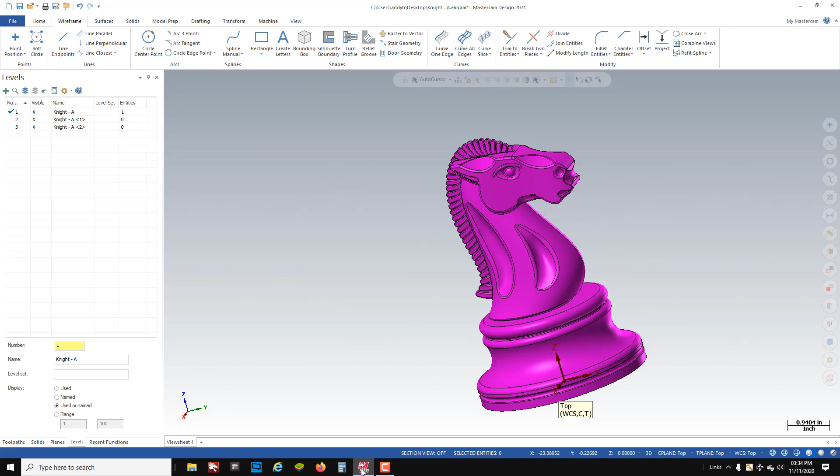The important note to know is that we're going to maintain a center of the part as our origin, meaning the X0 on the lathe will become the same Z0 when we transfer over to the mill, which will be center of the part, so that we can flip this thing 180 degrees in the mill.

Now, we're going to use a 4th axis mill for the milling here at CC, but anyone else doing this, any way to flip this part 180 degrees in the mill will work. So if you have a 4th axis, that'll work. If you just have a 5C collet block that you can flip, if not, you can just square up a block and put a 1-inch hole and use a set screw in the side of it, and that'll work as well. Just any way to hold this round part in a vise and then flip it 180 degrees for the turn.

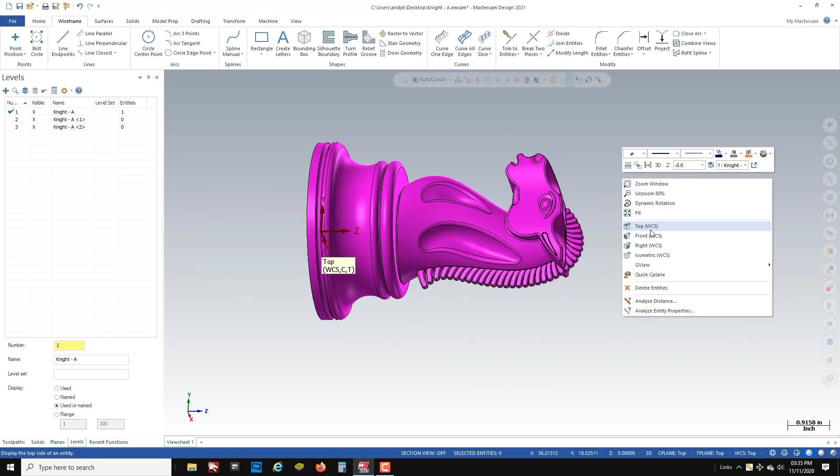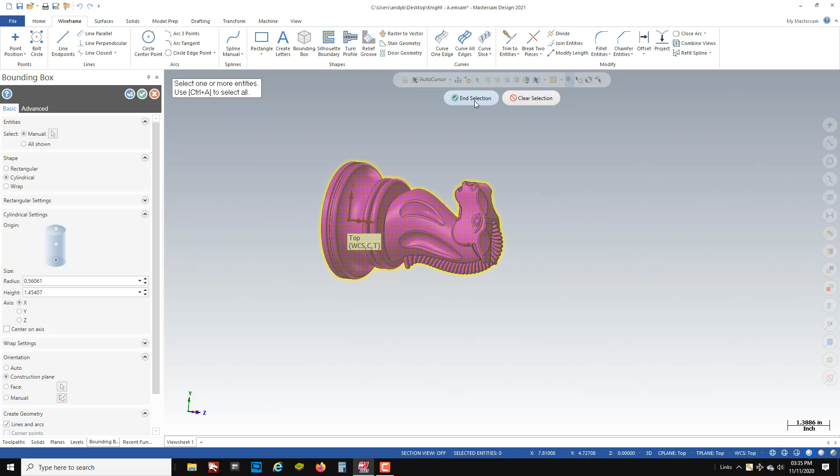So to get started with our video, the first thing I'm going to do is rotate this part into lathe position. So to do that, I want to find the center of the part, top of the head. So I'm going to go ahead and just create a bounding box, wireframe, bounding box. Now you can create this bounding box into a cylinder or into a square, it doesn't matter, as long as you can get the true center of the part.

Now I've had struggles with Mastercam and creating the cylinder. I'm not quite sure if it's a bug. I can show you here if I put it in the Z-axis and then I put it in a top view, you can see that my cylinder is off. It's not quite in line in X, and I'm not sure why, but if I change it back to a rectangle, then it makes it correctly. So I'm going to go ahead and just make mine as a rectangle. If it works for you as a cylinder, then great. It gets the same result at the end.

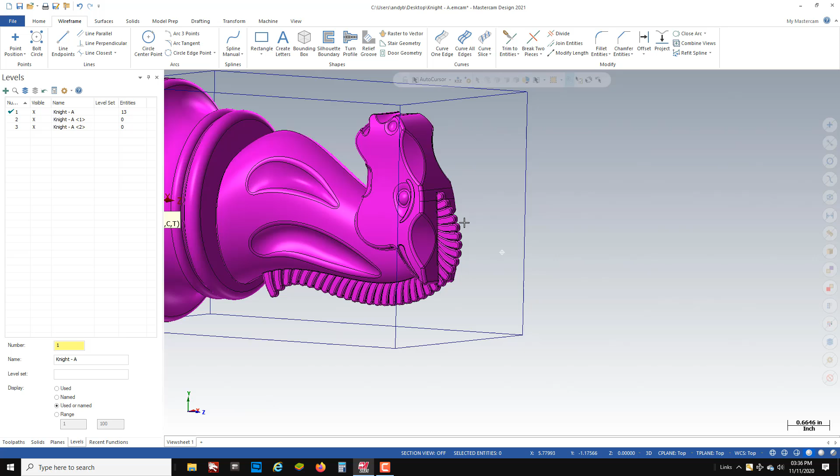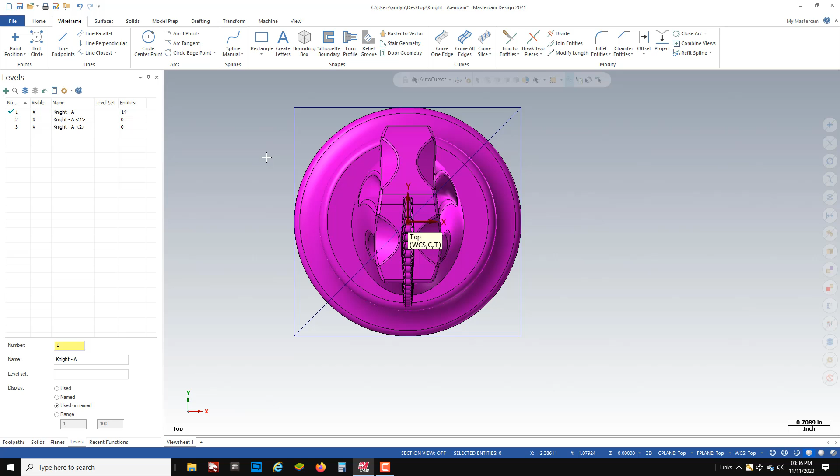So I create my box, and now if I just draw a line from corner to corner, the midpoint of that line will be the center point of my knight. And that's the point I'm really looking for. So with that point found, I need to now rotate this part to how I want to look at it when it's going to be in lathe position.

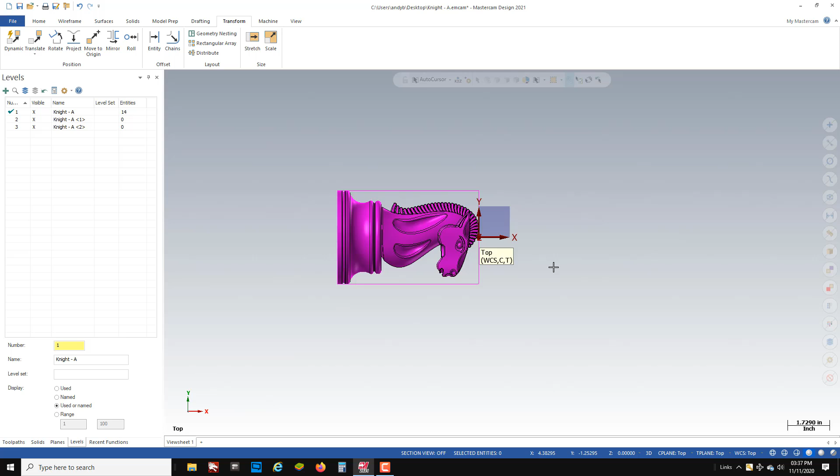So it doesn't matter where I click right now, I'm just rotating. I'm going to go 90 degrees this way. And then I actually like to get the head of the knight so that he's looking down instead of up. So I'm just going to go 180 degrees this way. Green check that. Now when I put it in the top view, you should see the knight in what I would call lathe position as I'm getting ready to turn it.

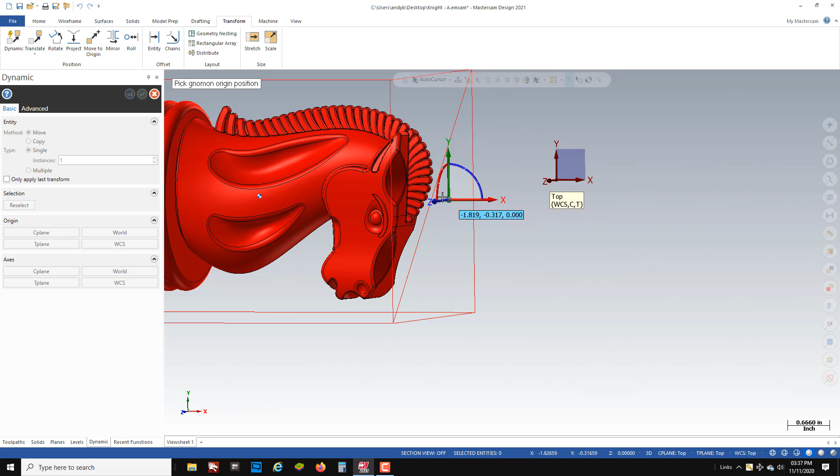So now I want to line up my origin here that I created from my bounding box onto my top origin, the original origin for Mastercam, or the gnomon, I guess you'd call it. Transform, dynamic, and selection. Select the midpoint of my line. Move it over to my standard gnomon, green check. Put that in a top view. Now I can set up my plane and get ready to start doing my turning toolpath.

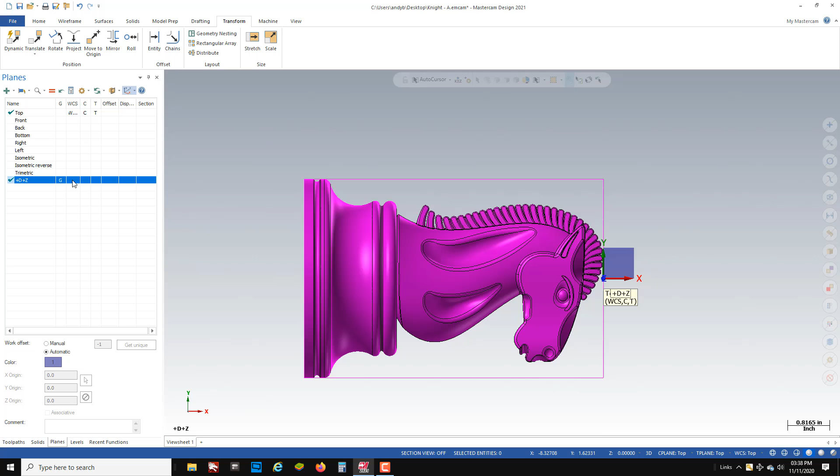Now I have not sized this knight at all for the finished size that it's going to be. I'm actually going to create my stock model first with the 1-inch diameter stock, and then I'll size my knight so that it fits in it. So before I create my lathe machine, I need to go to planes, create my +D +Z, activate my +D +Z for my grid, my work coordinate system, construction plane, tool plane. Now I can go to machine, lathe, default.

Now if I go to my toolpaths, you'll see there's a machine here. When I go to my stock setup, under properties, I'm going to tell it 1-inch diameter stock and 5 inches long. I'll green check that. Now under my chuck jaws, under the properties, I need to move over to the parameters tab. This is a new position in 2021 compared to 2020. So go to my parameters tab. I can tell it 1 inch diameter stock and a Z position of -4 inches.

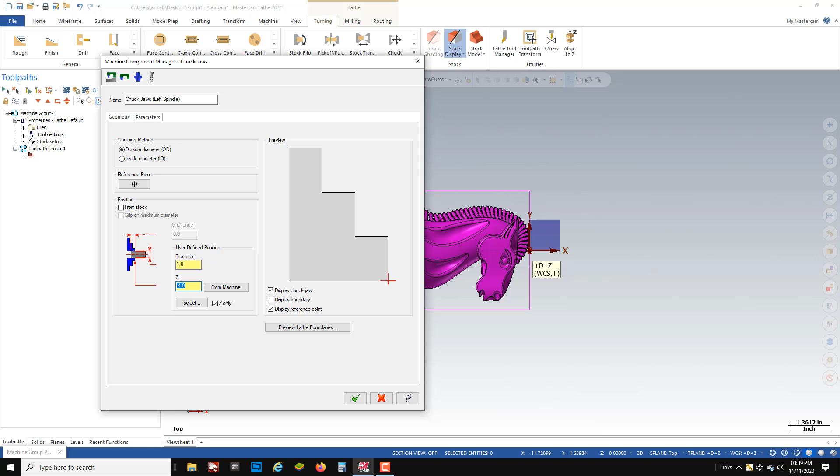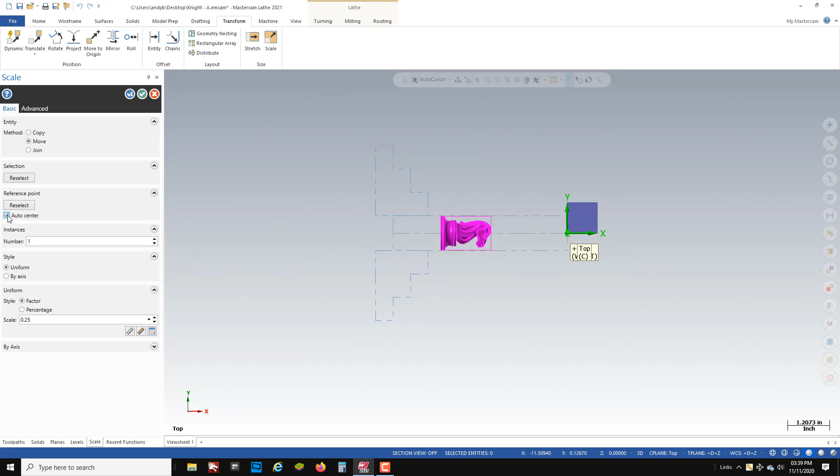And when I green check that, now you can see part of the chuck jaws here, and you can see that this knight is huge right now compared to what I want it to be. So now I just need to scale it down to position. So if I go transform, scale, grab the entire knight, my auto center will be on. I'm going to turn it off. And then I'm going to scale it to a factor of 0.25.

So if you see I'm at 0.25 here, then the actual knight fits within my stock boundaries. So we'll green check that. Now that should be a good position for the knight. Everything's perfectly on center. I'm scaled to the right size.

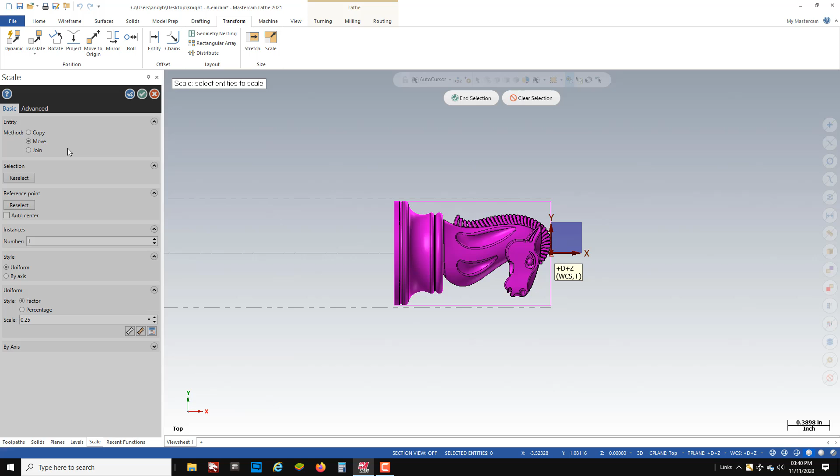You may want to make your knight a little longer. It depends on how big you made your other chess pieces. To do that, you're just going to go scale, grab the knight, and I'm going to scale by axis. So I'm only going to scale the x-axis. I'm going to leave the y and the z alone.

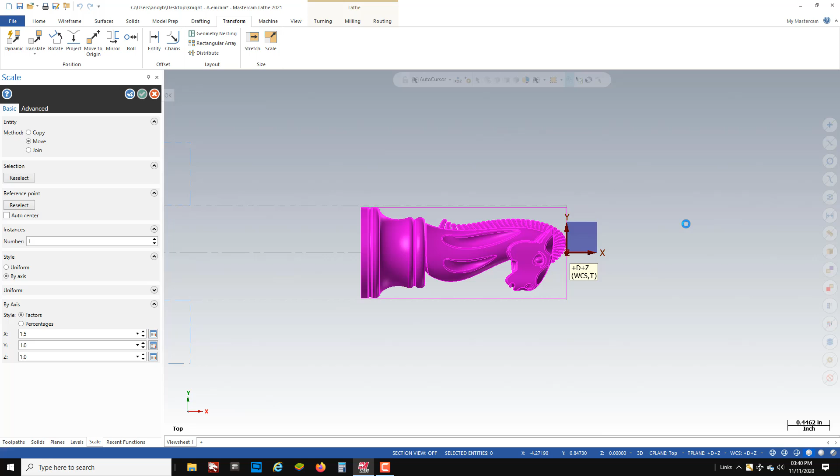So you can see that kind of stretches my knight out and makes him a little taller, which is perfectly fine to do. So I'm going to scale him out 1.5 inches taller, or 150% of his normal size. Green check. Now my knight's ready to go and be machined.

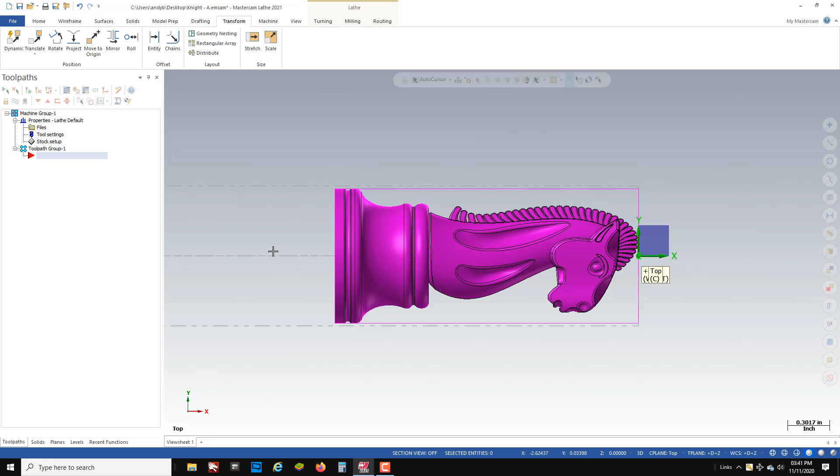Now when we're programming for a lathe, we don't typically program an actual model like this. We just need the wireframe for programming. So to create the wireframe from this knight of the outer extents, what I would use in a lathe, I'm going to first create a new level, level 4, and I'm going to make sure it's active. Now when I go to my wireframe, I can do a turn profile.

Select my knight, end selection, and it's actually going to create, when I green check it, the outer extent of what's being programmed for the knight so that it'll all fit into a round part. So you can see that it created the wireframe, and this sticks out a little because if this knight was to spin around in a symmetrical fashion, this nose would stick out on the top.

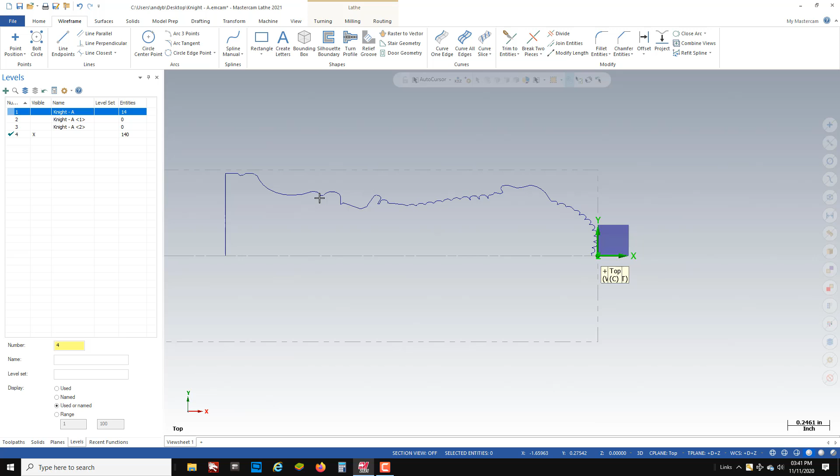Well, because I put it on its own level, I can now turn off the other levels, and now you can see this is what it would look like if I was to run this knight 100% lathe. Well, this needs a little bit of cleaning up. I don't like to have anything out here in front, below the highest point in Z when it comes to Z0.

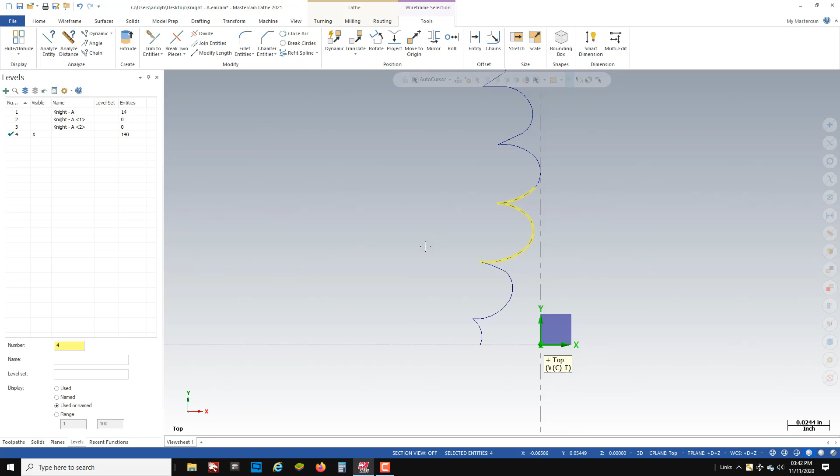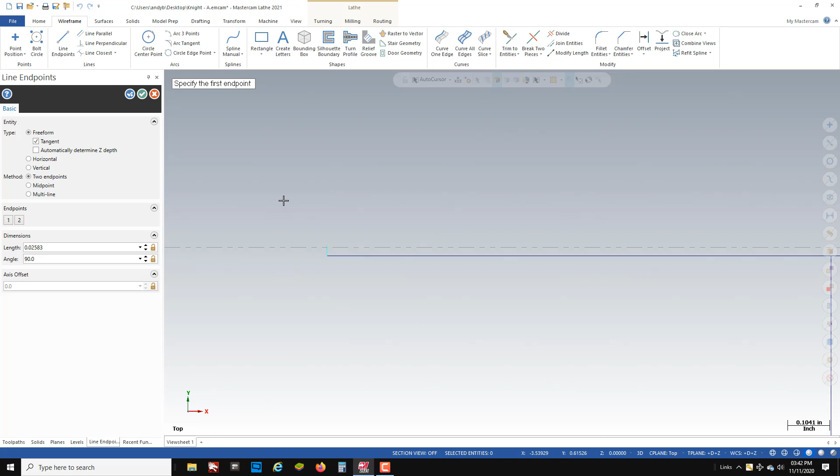And what that'll do is give myself extra holding stock when I transfer from the lathe to the mill. I have something that I can put in my fixture block or my 5C collet or my 4th axis to clamp onto. And then I always like to draw my line up past the stock so that it knows how much it's going to be roughing. And from there, we should be good to go to start programming this part.

Now, sometimes doing that turn profile, it'll leave some little gaps in here. If we find one, it'll show it to us when we're making the chain, and we'll have to go back and fix those gaps. So I'll show you if that happens.

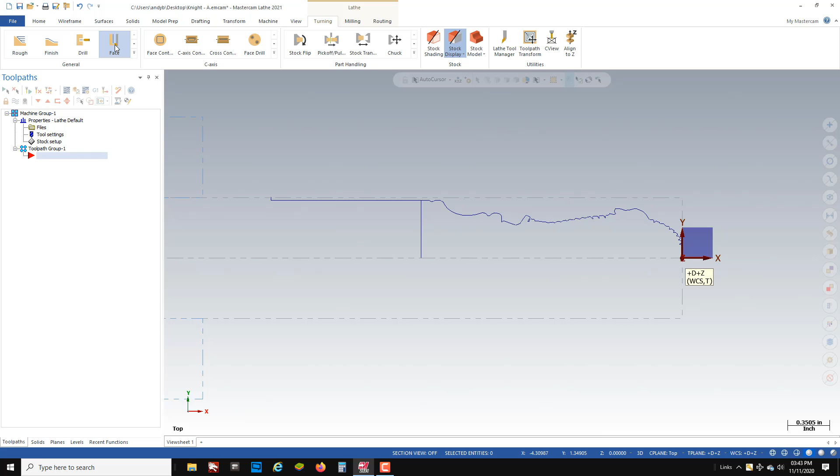So if I go to my toolpath now, turning, my first toolpath is always a facing. I'm going to use my custom library in here. You guys don't have to, you can use your own, but this Mastercam tool library is one that I've created, and I have the lathes here at our college set up with these tools already. So tool 1 is my CNMG. I'm going to use this tool to do my facing.

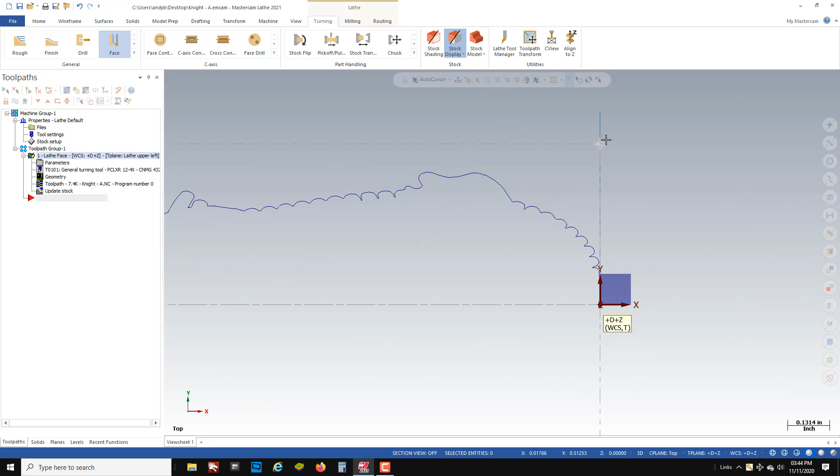I'm going to slow my feed rate down on that face to more of a finish feed rate and change my maximum RPM to 2200. And then I shouldn't have to touch my face parameters. It just defaults to facing right to 0. And you'll see there the tool came in, ran its face pass.

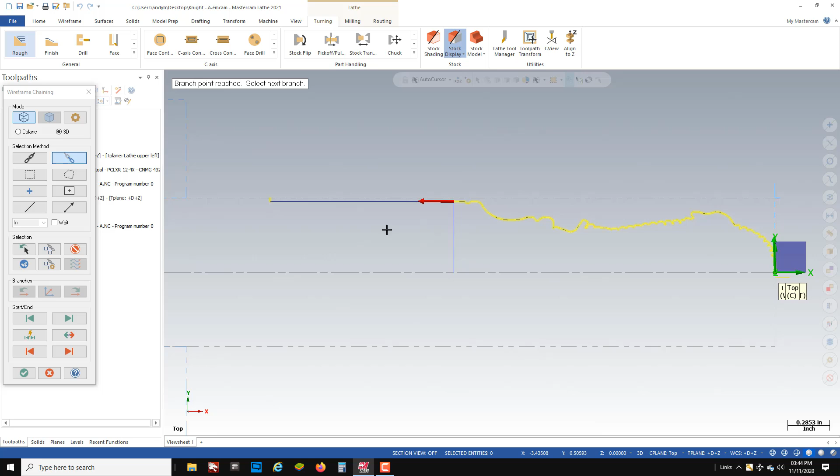Now my roughing toolpath, it's asking me to select the chain. And I'm going to select the first line, reverse it to the proper direction, and now I want to go select the very last line of my chain, which is this little line sticking up. And it looks like that all connected, and everything's going to work out well.

If this was to have stopped and not connected, that means there's a line or something in here that doesn't connect. You need to go back and fix that line. It will not work if you create multiple chains. So I'm going to green check that.

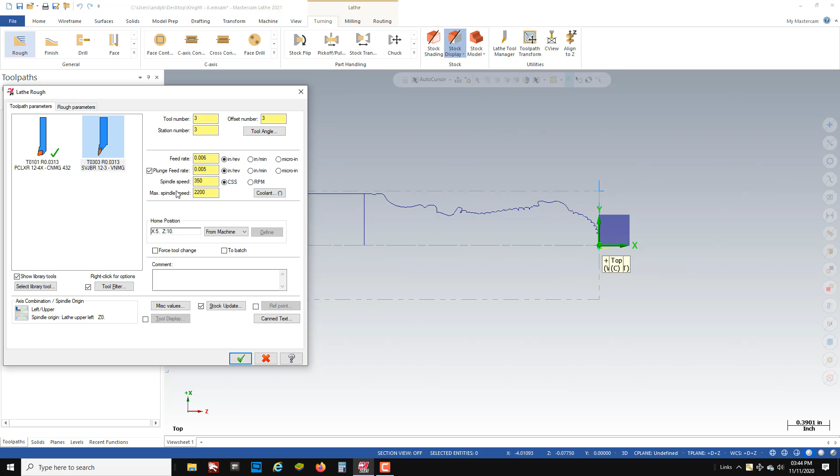I'm going to use my tool 3, which for me is a VNMG insert. It'll get down in this detail a lot better. Change my max spindle speed to 2200 RPM. Under my rough parameters, I'm going to change it to a 60 thou depth of cut, which is a 30 thou actual radial depth of cut on the lathe, 60 thousandths diameter cut. Leaving 10 thousandths stock allowance.

My lead in lead outs, because of all this extra detail, I don't want extra lead ins that are going to possibly violate stock, so I'm going to lead in straight down and lead out straight up. And then my plunge parameters, I want to make sure I can get in everywhere, so I'm going to change it to my plunge parameters that allow me to get into all those little details. Green check. And then you see that that tool is getting down in here and doing everything that it can cut.

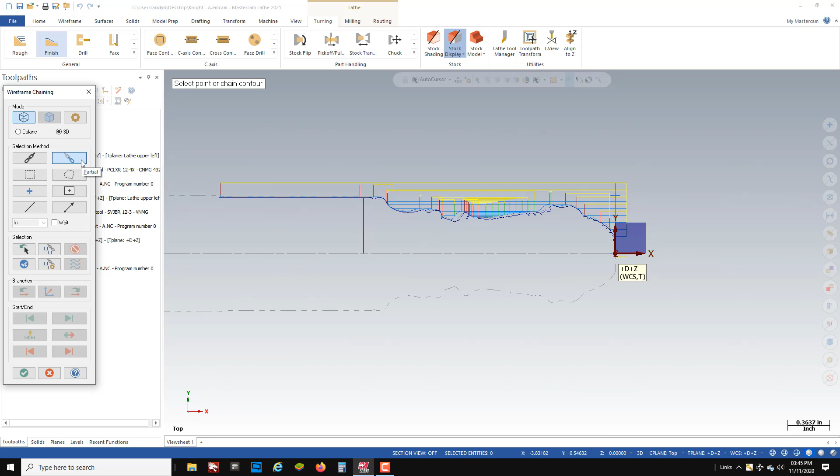Now I'm going to make my finish tool path. All right, when it asks me for my chain, since I'm using the same chain as the last one, I can come down here and use this last button. It'll automatically select the chain from the last tool path. Same tool. I'm going to slow that feed rate down for a finish pass of 4 thousandths inches per rev. Max spindle speed of 2200. Finish parameters.

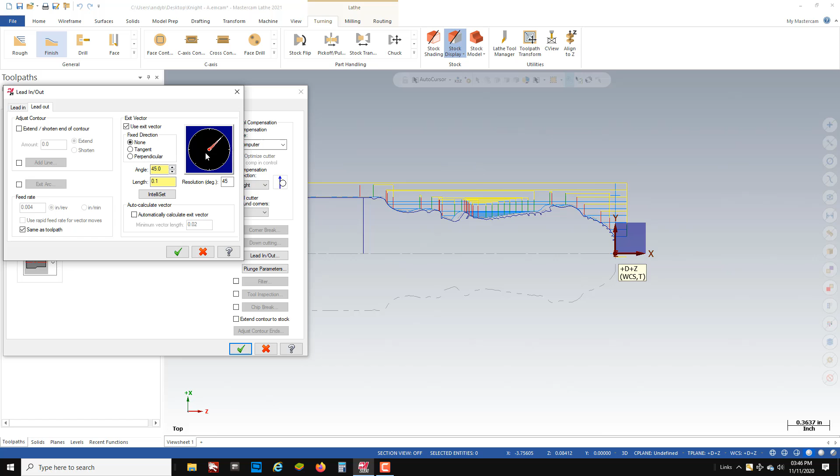We're going to go to my lead in lead outs. I'm actually going to lead in on an angle and lead out on an angle. Oops. And I forgot to do my plunge parameters. I'll go back in, change my plunge parameters, so I'll go into all the detail, green check. And since it's dirty, I have to regenerate. Good, so there's my finish tool path. Now I just got to do my cutoff.

On my cutoff, I'm going to go ahead and actually make a groove back here so I can see where the chess piece is going to eventually be finished. And then I'm going to go ahead and do a cutoff that cuts the part off in the lathe, an actual parting. So I'm going to go to my cutoff. It's going to ask me to select the point. I'm going to select this point first. This will be the actual end of the chess piece.

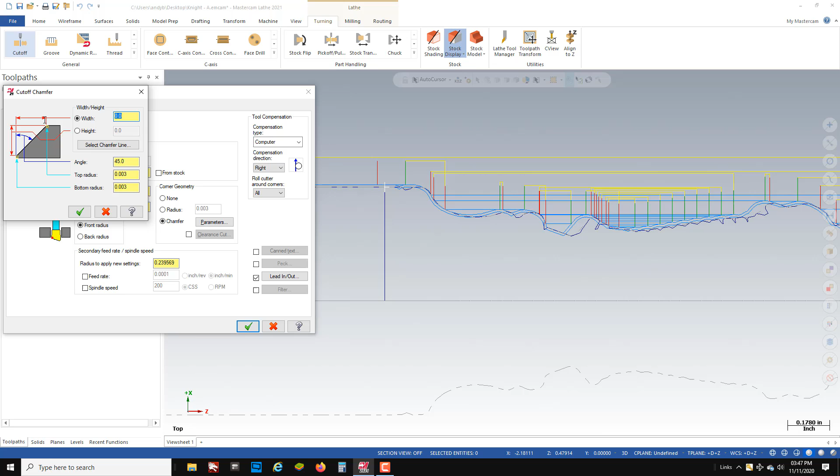Select tool from library. We're going to go to our tool 4, which is our cutoff tool. Everything's set here. I'm going to change my maximum spindle speed, 2200. Under my cutoff parameters, I'm actually going to put a chamfer on here of 20 thousandths. Now I'm going to get rid of these radiuses so that it just puts the 20 thousandths chamfer.

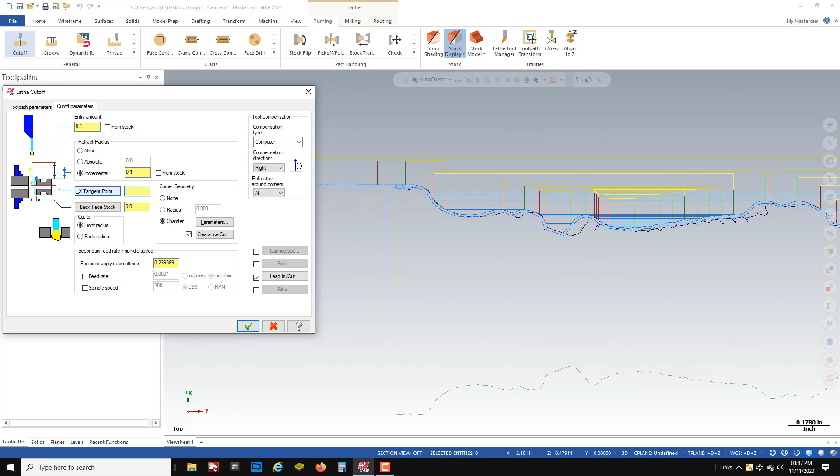But to do that, because I have a true cutoff tool and it doesn't like doing any kind of side cutting, I'm going to go ahead and add a clearance cut into there first. So I'm going to change my Z increment to 10 thousandths. Okay, and then so that I don't cut this tool off completely, I just put a notch in the back. I'm going to use an X tangent point of 0.5, which will cut it down to a 1/2 inch diameter. So now you can see it cut my little clearance cut, and then it cut my chamfer on the part. And this is what my part will look like all said and done.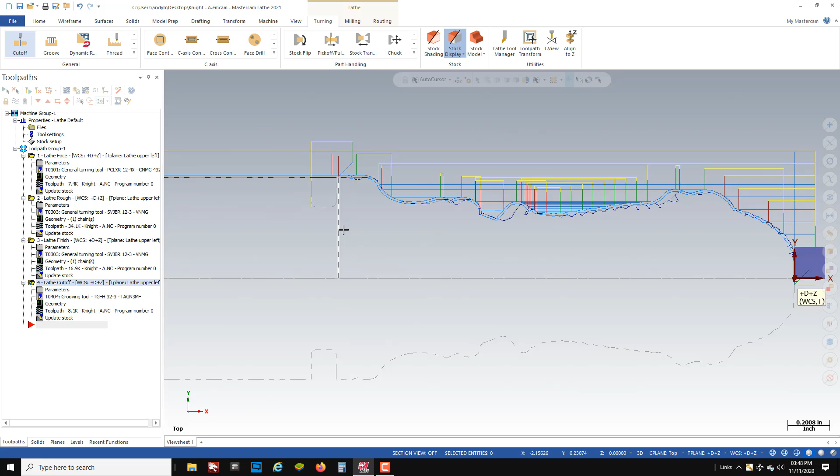Now we'll do a cutoff to actually cut the part off in the machine. So we're going to create another cutoff program, and we'll select actually the last point in the program this time. And without going in and changing any of the parameters, it's actually going to cut it right to 0 this time. So then you'll see the part falls away.

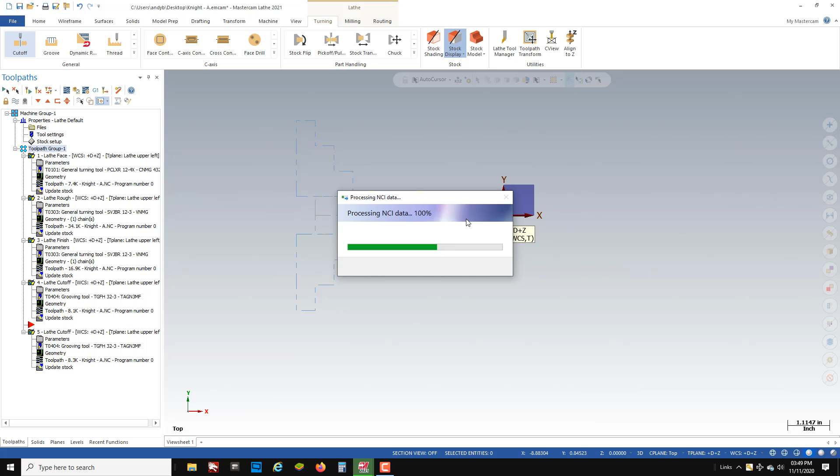So that's my lathe. We'll go ahead and take a look at this, and we'll see what it looks like in the simulator. And it's not going to look like a knight at this point, but that's okay. We're on the right path here. So slow it down just a little bit: facing, turning, finish turning. So let's put in stop conditions so that we can actually see it before it cuts off.

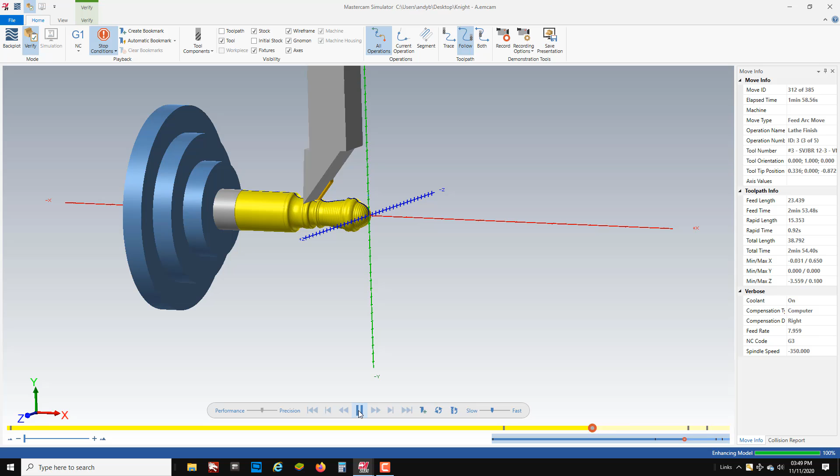Facing, rough turning, finish turning. There's my first notch cut off. And then my final cutoff. Okay, so now the part will be ready to take over to the mill. So for Mastercam, as far as we're concerned, we're just going to create a new machine that is milling. And I'm going to go to my levels and turn my actual knight back on.

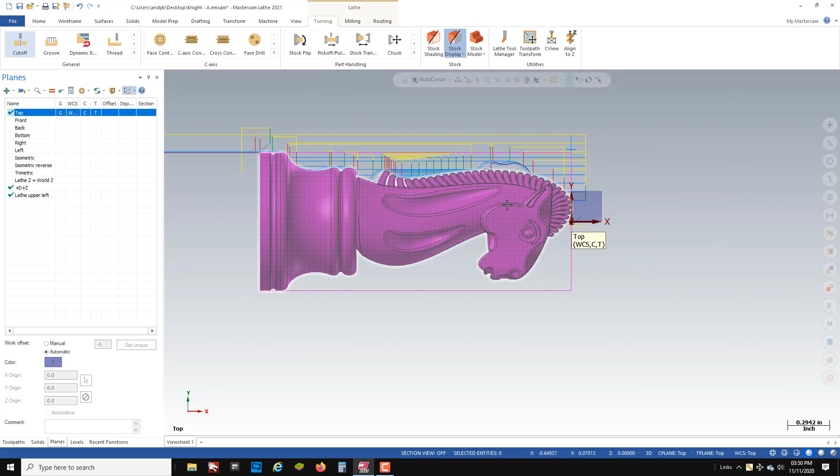So to create that new mill for machining, first of all, I'm going to go to my planes and I'm going to activate my top plane back on, because I don't want to use my +D +Z plane for my mill. So turn my top plane back on. Then I'm going to go to Machine, Mill, Default. And when I come down to my toolpath plane, you'll see I have a mill now down here. We still have our lathe up top. Now we're going to be doing milling toolpaths.

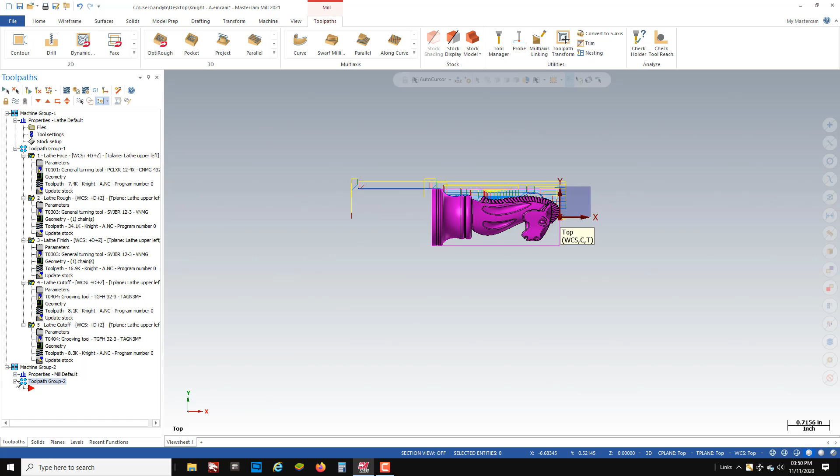I'm going to go to my stock setup. I'm going to set up a cylinder, 1-inch diameter by 4 inches long. Now this stock setup is only for visual. We're going to actually create a stock model here in a minute that'll use what I've turned in the lathe for my milling so that it doesn't cut a bunch of air cuts. So in my X position will be minus 4 inches. Green check. Oops. We're going to go back into there and we're going to push the display button. So we'll see our round cylinder now for our milling.

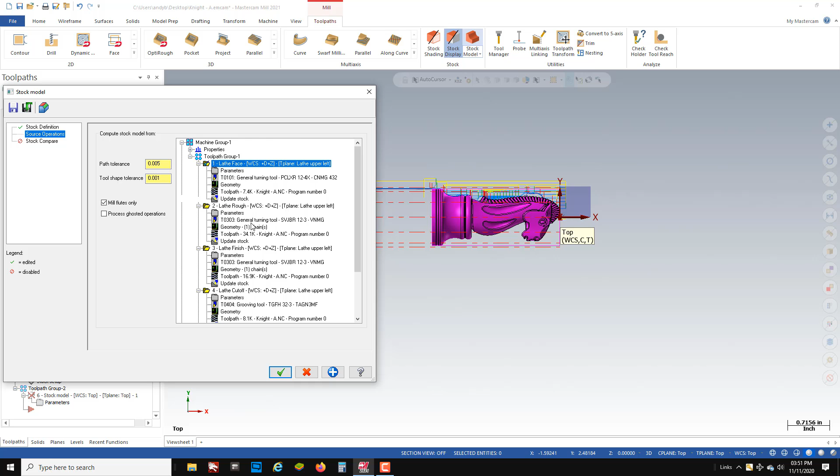Now our first toolpath that we're going to create is a stock model based on what the lathe did. So if I go to my stock model, and you can name it if you want, I'm just going to leave it called 1. I'm going to create that same cylinder again. X-axis, 1-inch diameter, 4 inches long at a position of minus 4 inches in the X-axis. Now my source operations, I'm going to use everything, so I'm holding the shift key down, 1 through 5, everything that I did in the lathe.

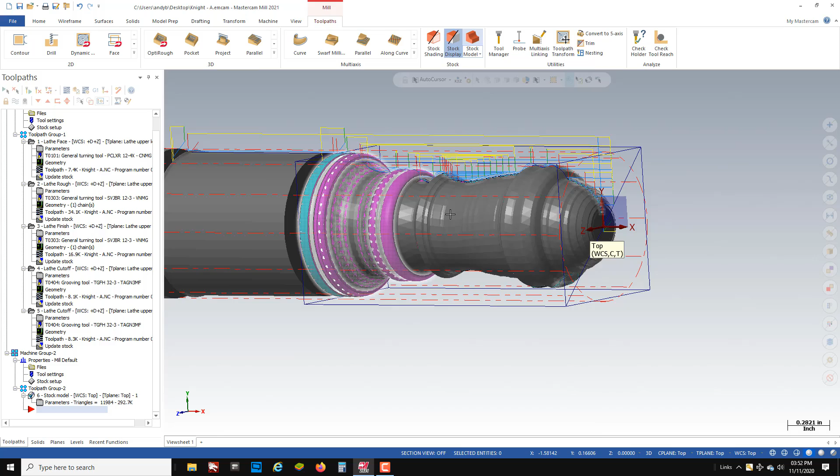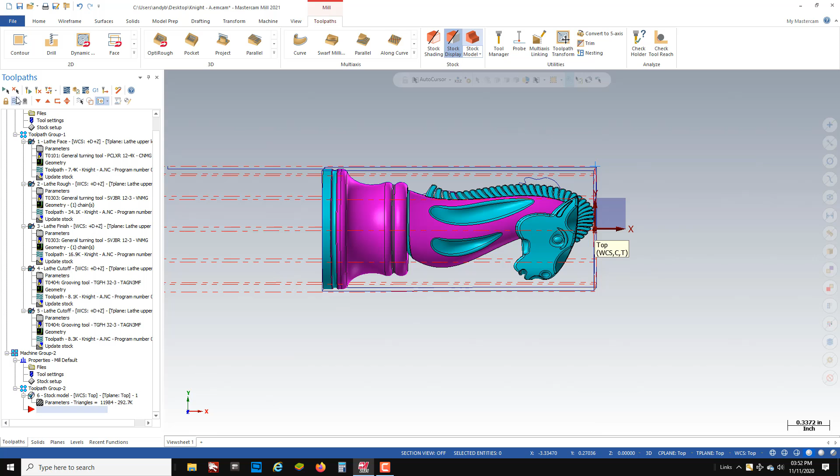And then as I green check that, it's now going to calculate a stock model that'll be what you see here. This is what I just cut in the lathe. So now we have this stock model as a visual aid and as a source for programming to rough and finish this knight. And you can turn this stock model on and off as if it was a toolpath. So let's grab everything. Let's turn all these lathe toolpaths off. Now we can start our mill programming.

So looking at this part and looking at that stock model, I'm going to go ahead and start roughing with a 1/2-inch end mill. But before I start my roughing, I want to create a boundary of where I want to use my milling toolpaths and where I want to stay out of for my lathe. So if you look at all this back here, these are all good, nice, finished turned surfaces that are symmetrical. So I don't want my milling cutters to go back in here and do any extra milling. So I'm going to wireframe rectangle, and I'm just going to create a rectangle right around here, and I'm going to say this is the area that I want to mill. So this is what I'm going to use as my containment boundary.

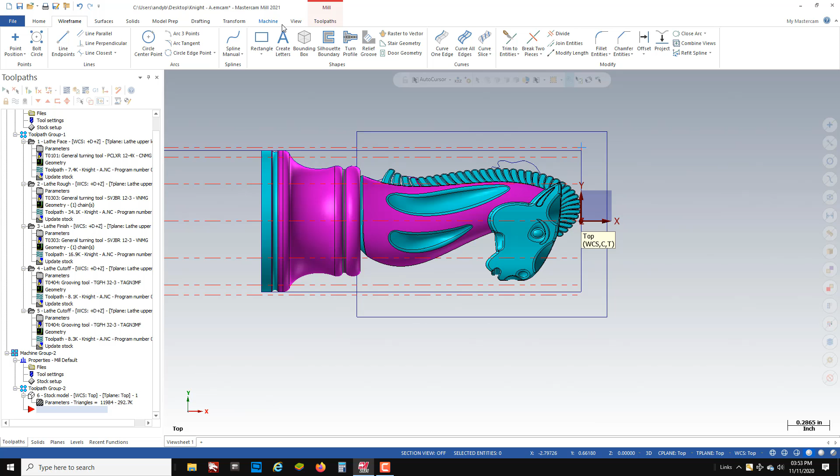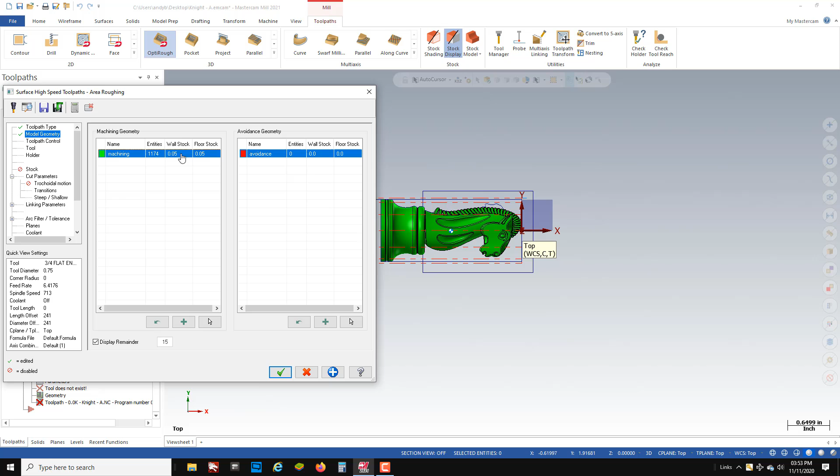So now, as we go to toolpaths, I'm going to use an Opti-Rough toolpath. And for this style of roughing, I actually like area milling better than dynamic. So I'm going to change it to area roughing. The model geometry, I'm just going to select the entire model. And then I'm going to change the stock allowance to 10 thousandths. I'm just going to rough it down to 10 thousandths. Toolpath control, this is where I'm going to select that containment boundary so that my tools don't go over here and cut this nice turned surface.

My tool, we're going to grab a 1/4-inch flat end mill. So we'll go to filter, none, select my flat end mill, and then we'll look for 1/4-inch flat. I'm just going to go ahead and make it tool 1. I normally calculate with surface footage, but I know I'm going to be maxing my machine out, so I'm just going to put my spindle at 5,000 RPM, and I'm going to use a 1% chip load, so it's 2.5 thousandths, and I'm going to make my plunge and retract the same.

Under my stock, I want to rest machine, so I don't want to machine everything. I just want to machine what this other operation left. And for the other operation, I'm going to go ahead and select my stock model. So that's selected as my source operation. My cut parameters, I'm only going to take a 20 thousandths step down. 45% step over is fine.

Under my steep/shallow, I only want to go far enough below this part to where my ball has clearance when it does my finish cutting. And I'm going to use a 3/16 ball cutter. So 3/32 is my extra clearance that I need. So I'm going to detect limits, and I don't want to go the 0.479 deep. I want to go to 0 minus the extra clearance I need. So I'm going to go 100 thousandths past 0. So minus 0.1.

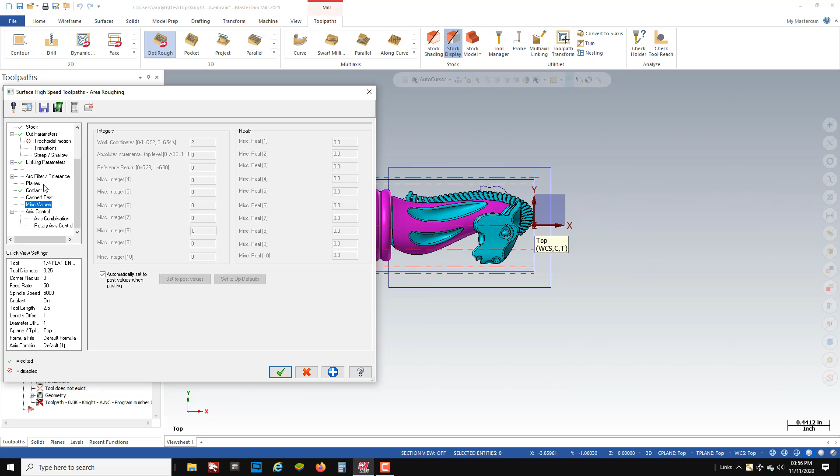And then we come down to coolant. I'm going to turn my coolant on. And then if you don't have high-speed machining and you're actually using a machine, you may want to change some of these miscellaneous values for the G187. But if you're using high-speed machining, you don't have to worry about it. If you're using the Haas default machine, they won't even pop up. But I just wanted to note that sometimes when I have a Haas post, I'll actually go in and change those. But we'll green check that, and it'll take a minute to calculate here what our first roughing toolpath looks like.

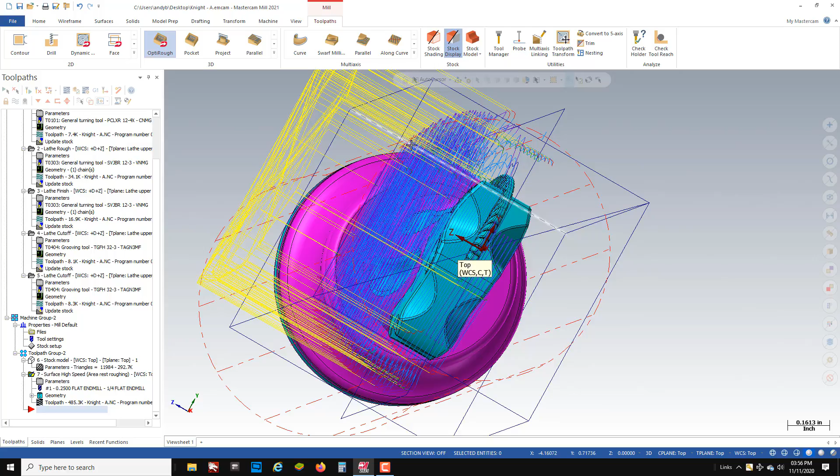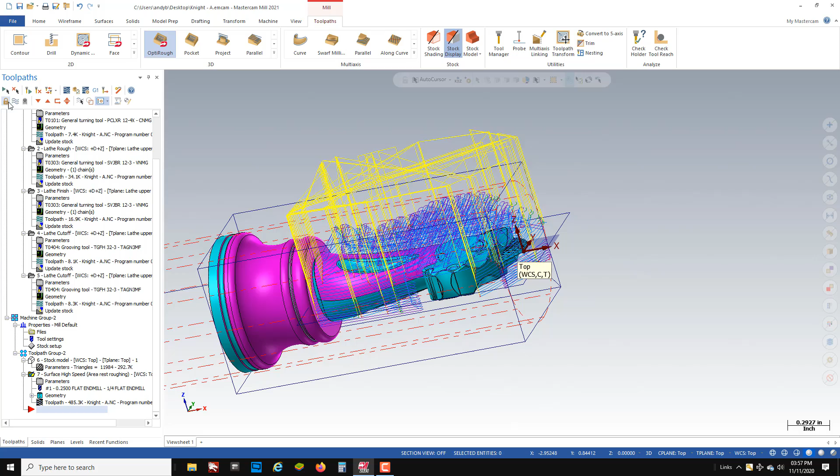Okay, so that's not too bad of a toolpath. You'll notice in this toolpath that it's rounded like that. That's because it's actually looking at that stock model that we created from before, and not just looking at a big square block or a big round block. So we can turn that toolpath off. Now I'm going to re-rough it with an 1/8 inch flat end mill, which is going to get down into some of these cracks and areas that the 1/4 inch couldn't get down into.

So that I don't have to restart over on everything, I'm just going to take this toolpath, copy, and paste. Toolpath 8, I'm going to go into parameters. I'm going to go to the tool, and I'm going to create a new tool, or grab an 1/8 inch flat end mill. It's going to be tool 2. Same speed, 5,000, but for my chip load, 1% of my diameter, it's going to go down to 24 inches a minute.

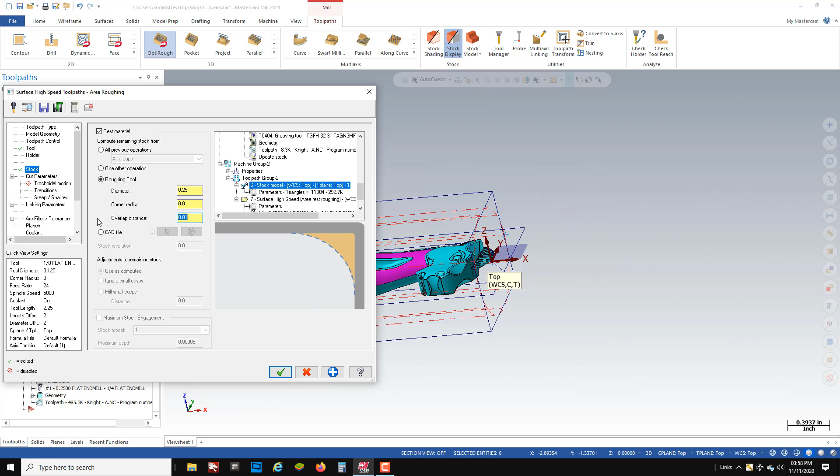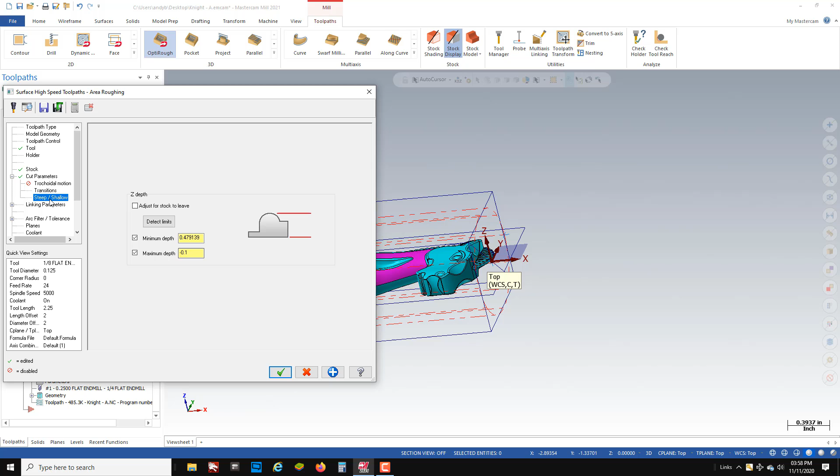Under the stock, instead of using previous operations, I'm going to tell it a roughing tool. I'm going to tell it, hey, I've already gone in here with a 1/4 inch flat cutter, and I'll even let it overlap 10 thousandths. And then it'll look for what a 1/4 inch cutter cut and what can I cut now. So the step down is at 20. We're going to put it at 10. This tool might be sticking out a little long for what it's doing. 45% step over is good. Steep shallow is good. We're going to go to that same 100 thousandths below the part. And then we're going to go ahead and green check.

Now this is going to calculate a roughing program that's going to go dig out where that extra stock is. Some of these programs that do a little bit of extra calculating take a little longer. Oh, I have to generate dirty because I copied it. If you're ever wondering, is it doing anything? You look for this little green part here. That means it's calculating. And if you want to see what it's actually doing, you can go to the view and turn on the multi-threading. Then it'll give you a little window that'll show you what it's actually cutting, and you can see that progress bar right there.

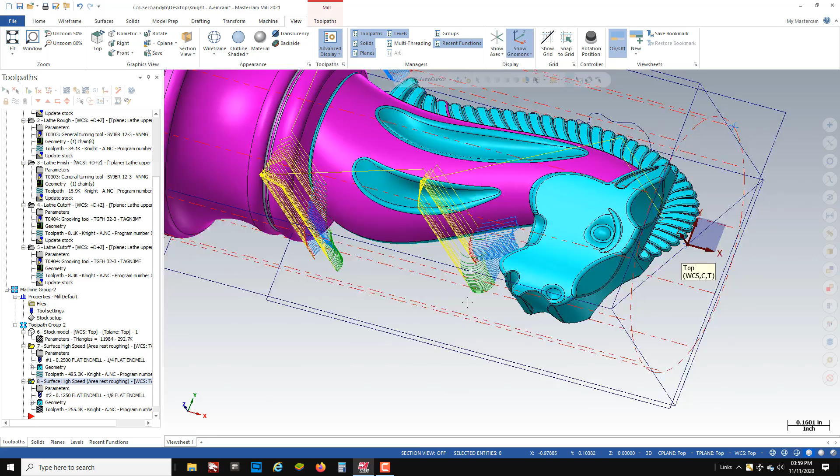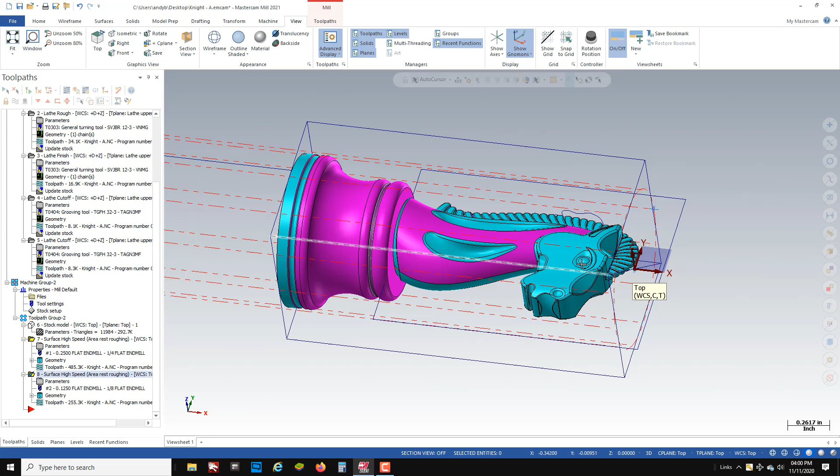So that one's done. And if I look at it, we can see that 1/8 inch said, hey, we got extra stock here, right underneath his chin, a little bit on the back here that still needed to be cut from what the 1/4 inch couldn't get. And that's exactly what we were looking for. Let's just dig it out a little more before we run our ball cutter. Now that it's roughed out, we're going to make a toolpath. I'm going to use a 3/16 ball cutter to cut this. So toolpath, we're going to go to our finish toolpaths, and I'm going to run a hybrid.

So our geometry, we're going to select the entire part again. Stock allowance will be switched to 0. You go under toolpath control, we'll select our bounding chain. Our tool, we're going to go to the tool library, filter, none, and then we'll click the ball. I'm going to select the 3/16 ball, which is a .187 ball.

I like to rough one size smaller than I'm going to finish. So I rough to an 1/8 inch flat. Now I can finish with a 3/16 ball, and I know that it's not going to crash into corners and do a lot of chattering. So 3/16 ball cutter, it's going to be tool number 3. We're going to run at 5,500 RPM, and we're going to run it at 35 inches a minute.

Okay, I'm not going to worry about stock undercut parameters. I'm only going to take a 4 thousandths step over with this tool, and a 4 thousandths step down. And instead of one-way cutting, I'm going to zigzag. In my steep shallows, same thing. I don't want to go past, I only want to go just the radius of the tool just past halfway. So it's an extra 93 thousandths.

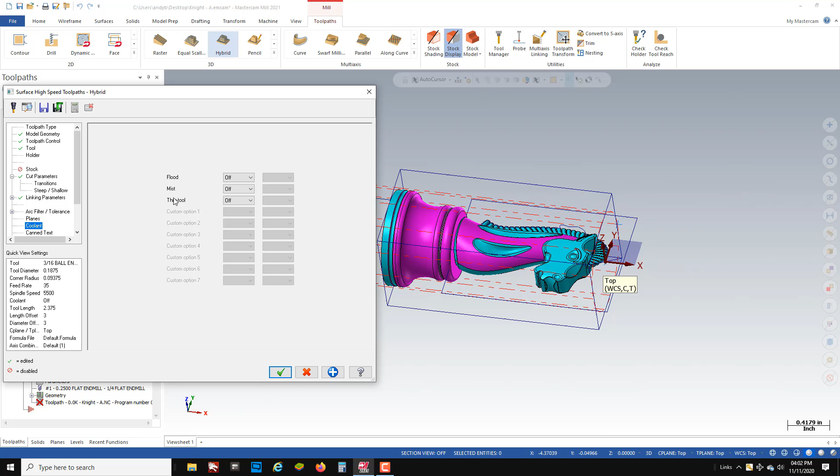Under my linking parameters, same thing. I only need to be 3/4 inch rapid absolute above the part, and then I'm going to change these values to 10 thousandths again. I just don't need all these huge arc moves for this little tiny part. And then we'll make sure we turn our coolant on. And we'll green check that.

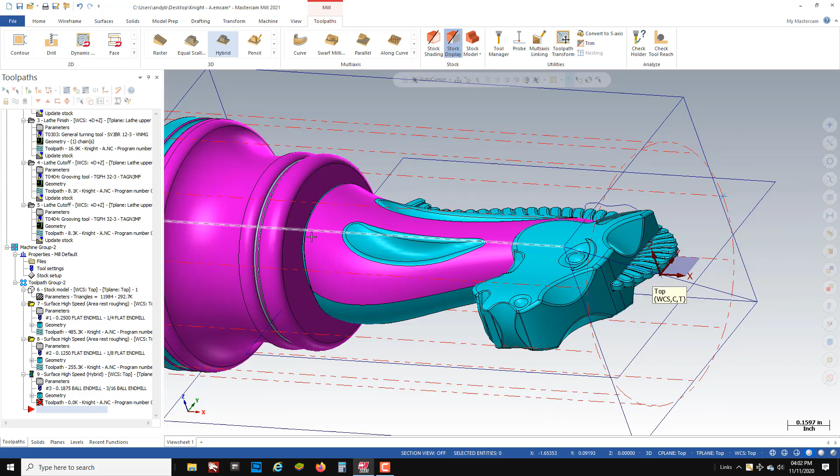Now this is going to finish the part and it's going to make it look pretty good. Although we did rough it with an 1/8 inch flat, and there's some areas where that rough tool will get into that this 3/16 ball cannot get into. And therefore we're going to want to do one remachine. And I'm going to remachine it with a 1/16 ball cutter. And it's going to dig out the rest of those little areas, and it's going to make this part look pretty sharp.

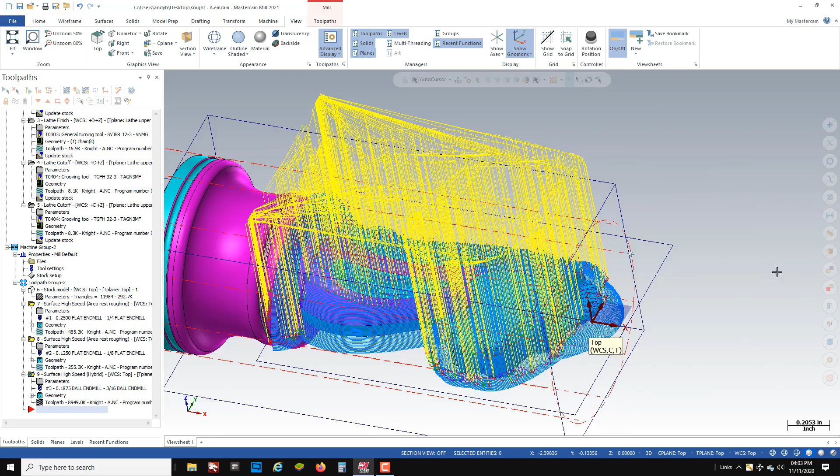So if I go to my view and I look at my multi-threading, oh, nope, toolpath's done. Don't need to look at that. And you can see it just went to the halfway point. Got down there. This should make this knight look pretty good. So now if we go ahead and run a pencil with a 62 thousandths ball, that will really sharpen this up. So toolpath, pencil.

We're going to select all the model geometry. Stock allowance of 0. Toolpath control, that same area that we selected for the other ones. For my tool, select tool from library, a 1/16 ball. Tool number 4, 5500 RPM. Our machines max out at 6. I usually don't like to run them at max, so I'm running at 5500. I'm only going 15 inches a minute.

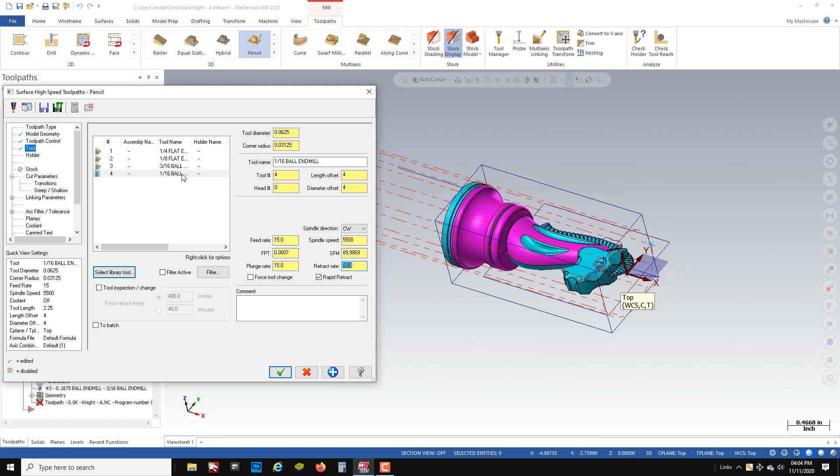Now, this 16th ball is not a straight tool. These 16th balls have an 1/8 inch or larger shank. So what I'm going to do, just so that my shank isn't violating, is I'm going to go in and modify this tool a little bit. So my cut length on these is usually only about 200 thousandths. My shoulder diameter is 1/8 of an inch, and my shank diameter is 1/8 of an inch. Usually there's a little taper on there. Mastercam's not letting me select the taper.

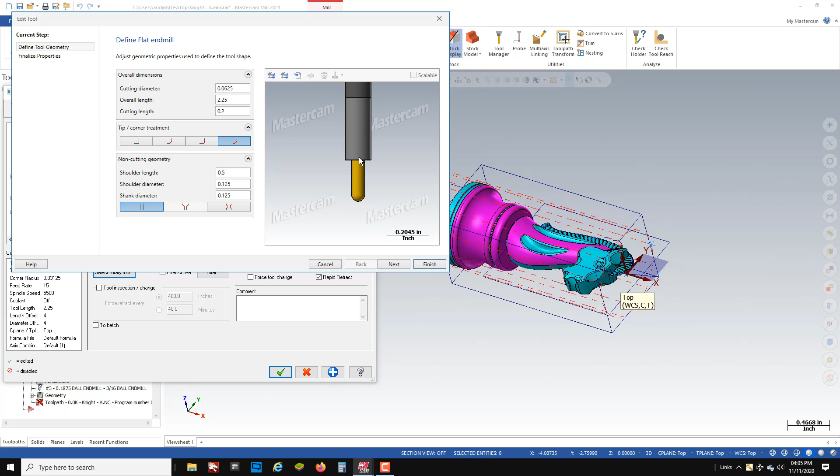What we have here, though, is a better representation of what's actually going into the machine. So by drawing this 1/8 inch shank on here, it'll make it so that this coming straight down along these walls does not violate into the part. So as long as your 1/16 ball has 200 thousandths of cut before it starts tapering up, you should be good with this tool.

So under the stock portion, we're going to do the same thing. We're going to use a roughing tool of a 0.1875 ball cutter. So 0.1875 divided by 2. Okay, we'll give it an 8 thousandths overlap, which is going to be roughly 2 passes because I'm only going to take a 4 thousandths step over. And then my maximum number of offsets, I'm going to uncheck that. I don't want to tell it how many offsets. I want Mastercam to figure that out for me. So if I just uncheck it, it'll do that.

My steep, shallow, detect limits. I do not want this ball cutter going further than halfway on the part. So minus 0.035 will get me just past the center of the part. Linking parameters again, 0.75 absolute. Change all these to 10 thousandths. And then I'm going to turn my coolant on.

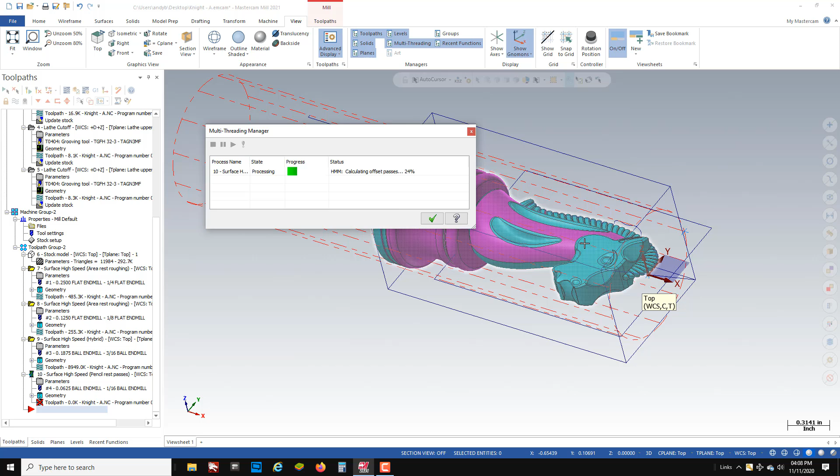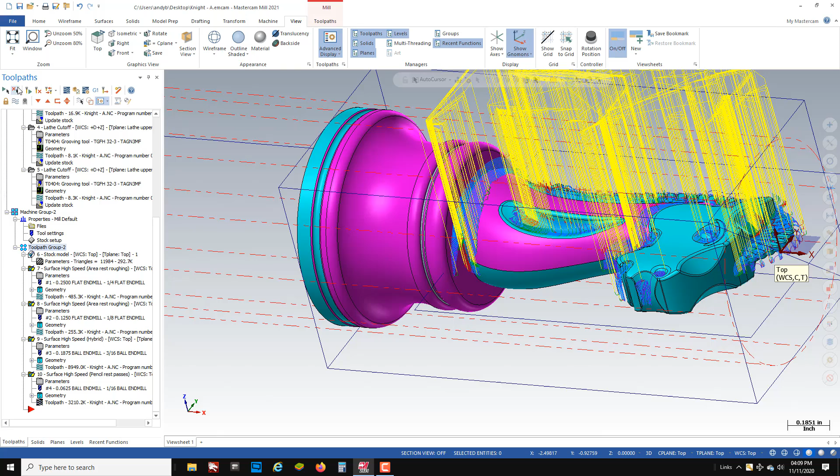Okay, so now that this is finished, we can see that 1/16 ball went in there and really detailed out some of this stuff to make it look a lot better. So now we'll select all of these operations, turn them on, and actually, you know what? Let's select everything that we've programmed so far, lathe and mill, turn it on, and then let's go check and see what it looks like before we get our next part programmed.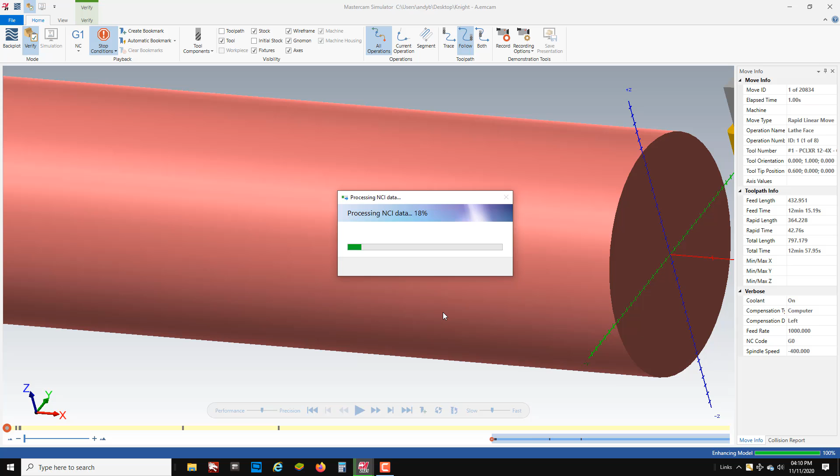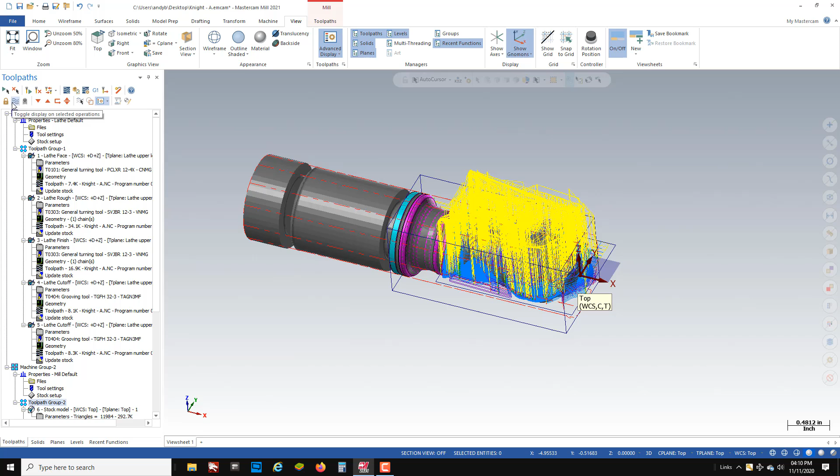And so far, not too bad. It says we got about 45 minutes into this. So if we look at the lathe, we've seen this earlier. Ooh, and our part disappeared. Nope, I have to go fix this so we're not cutting that part off. 1 second. Let's try this again.

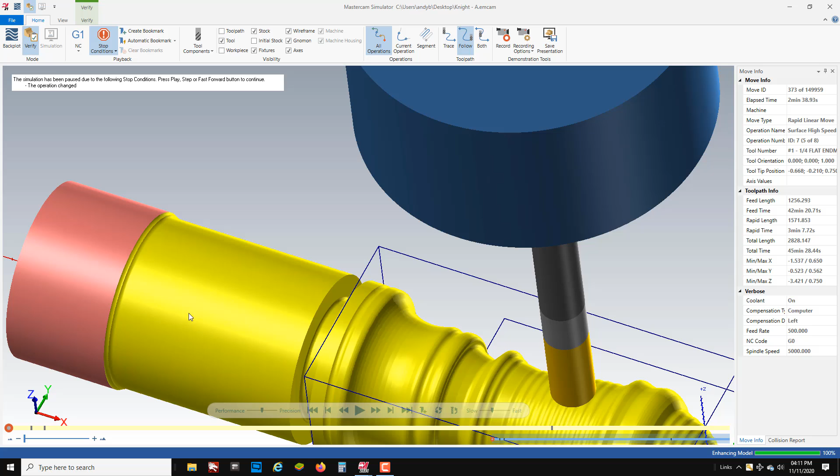Okay, so it's got the groove. I just unselected the cutoff so that we don't see it happening. So now we're going to do that rough mill with the 1/4 inch flat. Looks good. Here comes the 1/8 inch to dig out the extra stock. Looks good. The 3/16 ball. And you can see as it cuts right up here, you're not seeing a whole lot happen because a lot of that was turned on the lathe already.

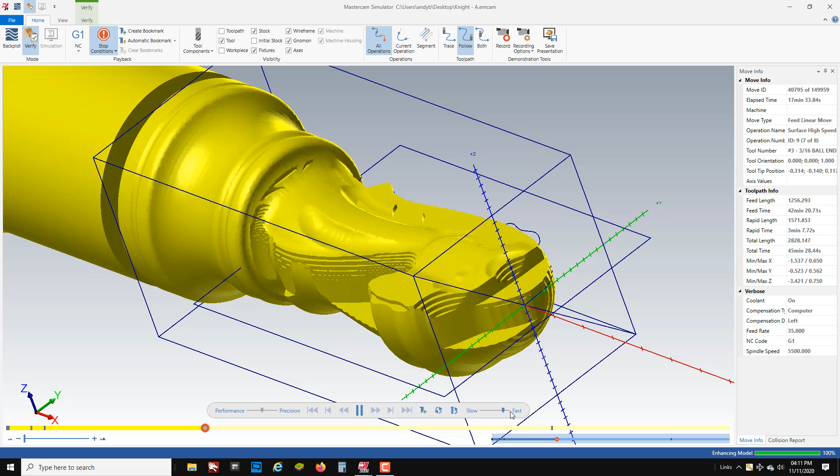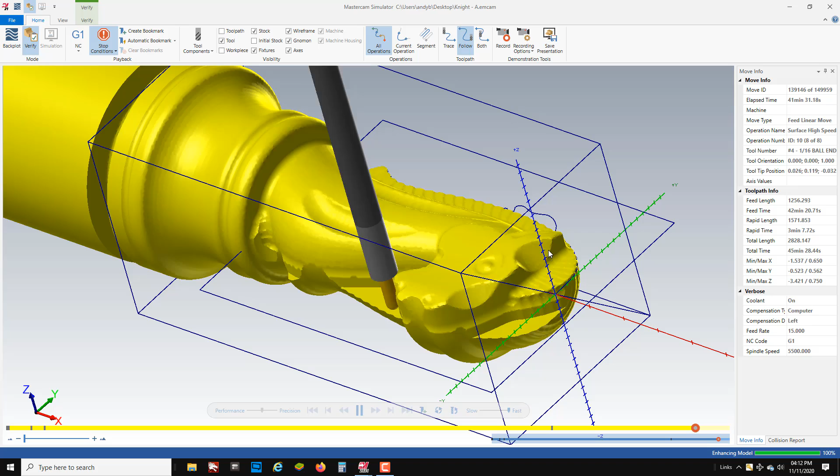And as this 3/16 ball cuts, you notice some of these marks left over from the 1/4 inch flat and the 1/8 inch flat. That's okay because our 1/16 ball should come in here and clean up all of that. And that's why we ran that 1/16 ball. Speed this up a little bit. The knight's looking pretty good. And now this last toolpath is a 1/16 ball, and it's just going to come through, and you can see that 1/8 inch shank on there, and it's just going to clean up everything else that it can. So this knight, for being halfway, is looking pretty decent.

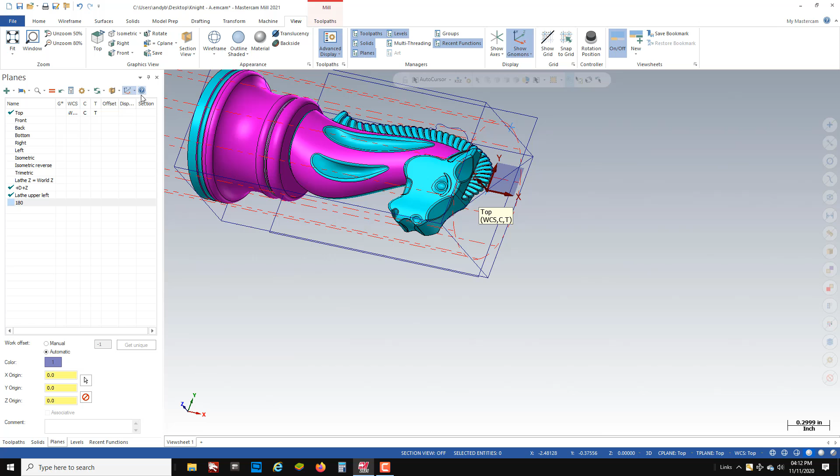Now, for the other side, what we have to do is first create a plane. And I'm going to create a new plane based on the top. So we're going to plus dynamic. And I'm going to place this plane on our top plane. And I'm going to go ahead and just rotate it 180 degrees. And I'm going to name it 180. Now you see I have this 180 plane. Well, I don't need to activate it.

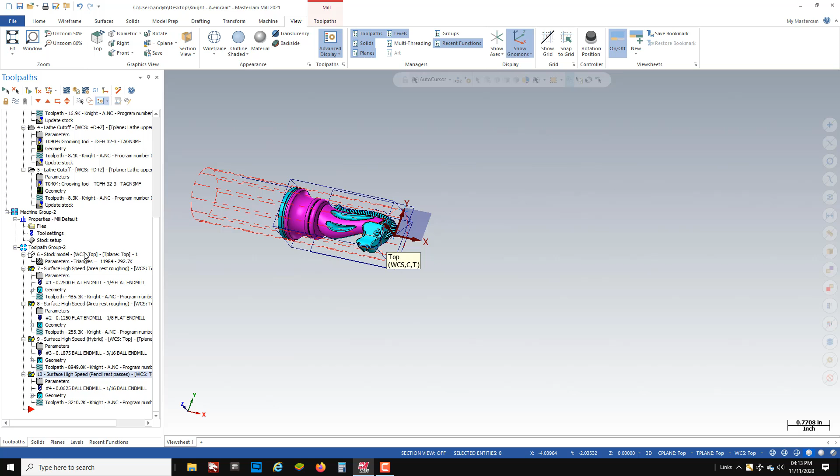All I need to do is go into toolpaths, and I need to take 7 through 10. So I'm holding the shift key down. I'm going to right click and copy, and then right click and paste. So now if I go to toolpath 11, which is my new toolpath, and I go into the parameters, I can come to the planes tab. And I'm going to change these to the 180 plane. So if I select this little button here, I can scroll down and I can see 180. Green check. And I'm going to push the over arrow so that my WCS, my tool plane, and construction plane are all the same.

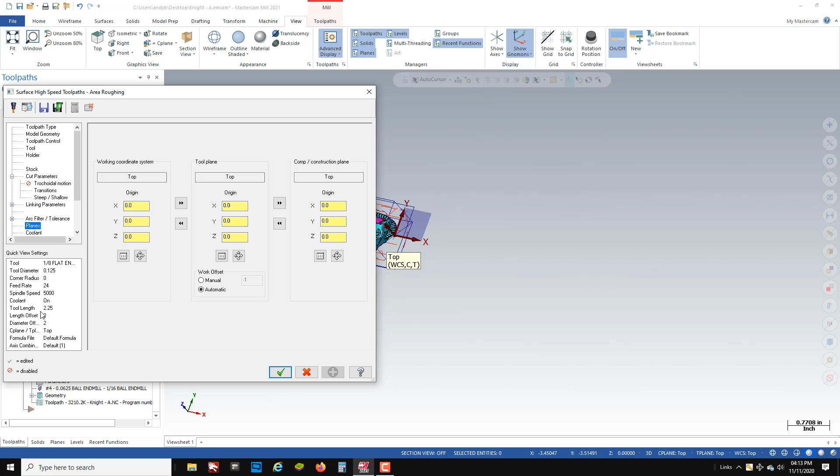And I'm going to continue to do that through all the 4 new toolpaths. So toolpath 11, parameters for toolpath 12, planes, 180, over, parameters, planes, 180, over arrow, and then one more toolpath, parameters.

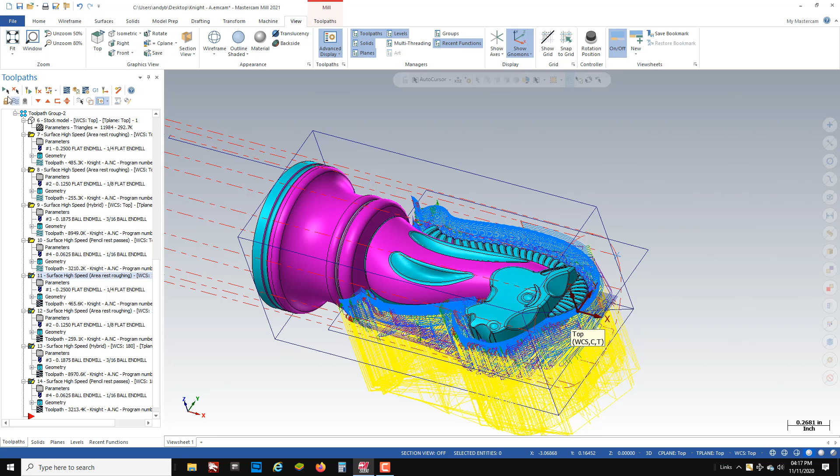Okay, so now that this is done, I should have all the toolpaths coming from the back side as well as the front side. And that should be everything to program this part. So let's take one last look at it in the graphics to make sure that everything looks good, and then you should be ready to post out your programs and run. I'm going to select all operations. I'm going to push the control button and then unselect my cutoff for the lathe. Go to my verify. I'm going to turn off my stop conditions, and I'm just going to let it run.

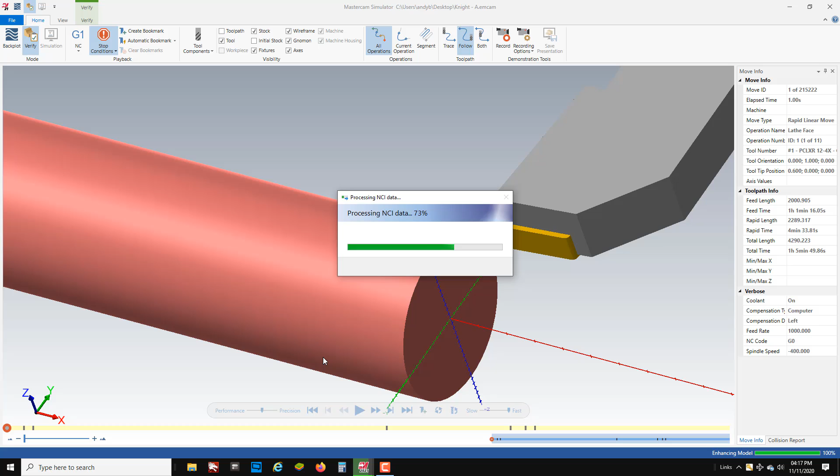So right now it's got it at about an hour and 28 minutes. It seems like a long time, but if you're making a chess set, you're only making 4 knights. So that's really not too bad. A couple class periods, and you'll have some really cool looking knights to go with your chess set. So you can see operation 1 finished, and then here we're cutting the other side. Finishing with the 3/16 ball. And we're going to go ahead and go into the pencil trace.

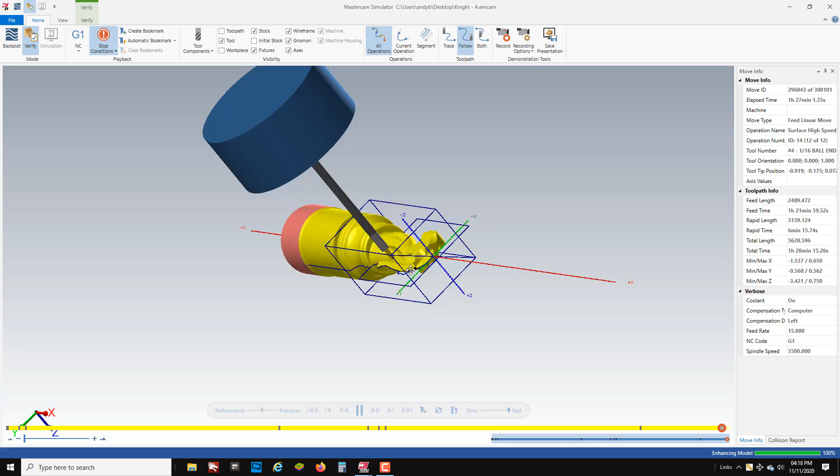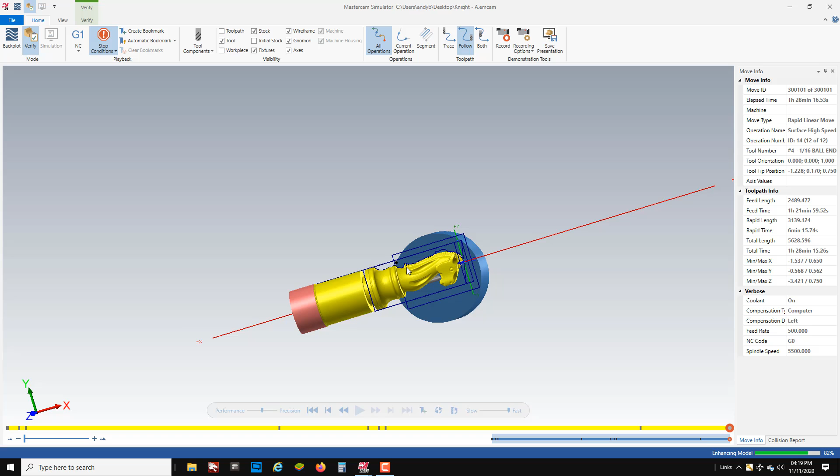And that is a pretty sweet looking knight done on lathe and mill in Mastercam. So I'm pretty happy with it. Go ahead and watch this video over and over until you guys get it done. And I look forward to seeing your knights programmed and cut in aluminum.